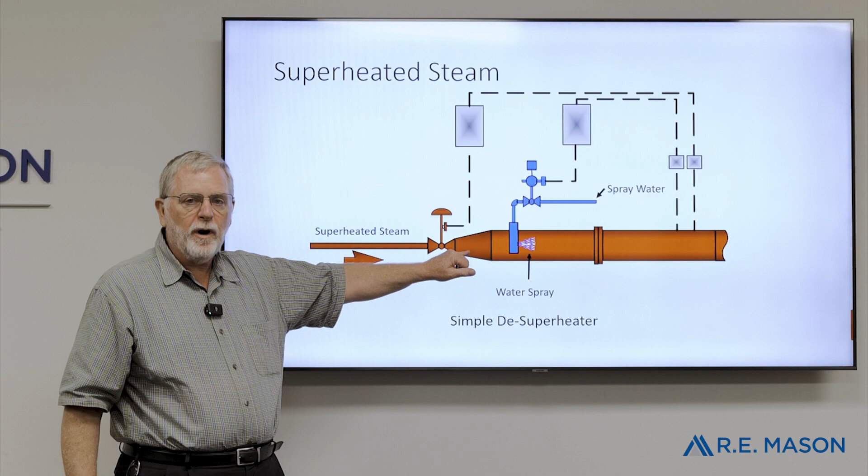So what do we do? Well, what we want to do is make sure that on annual outages we're pulling the desuperheater out, we're checking that nozzle, and we're making sure that nozzle is giving us a spray so that it's being absorbed and not a stream that's going down into your piping.

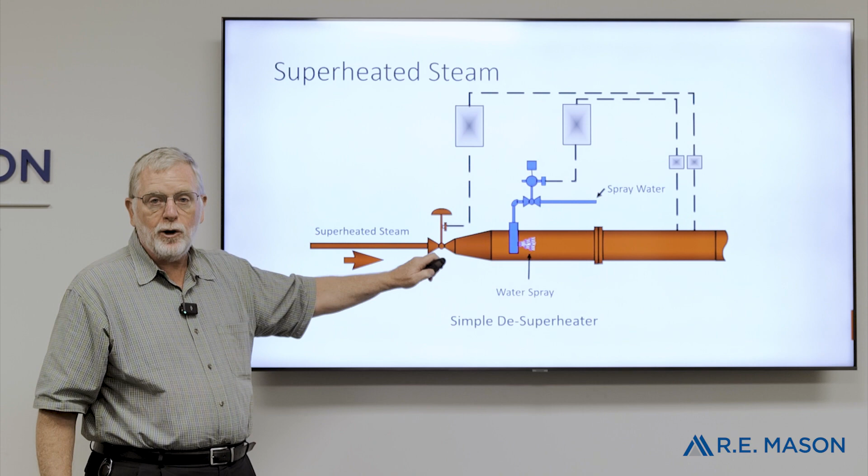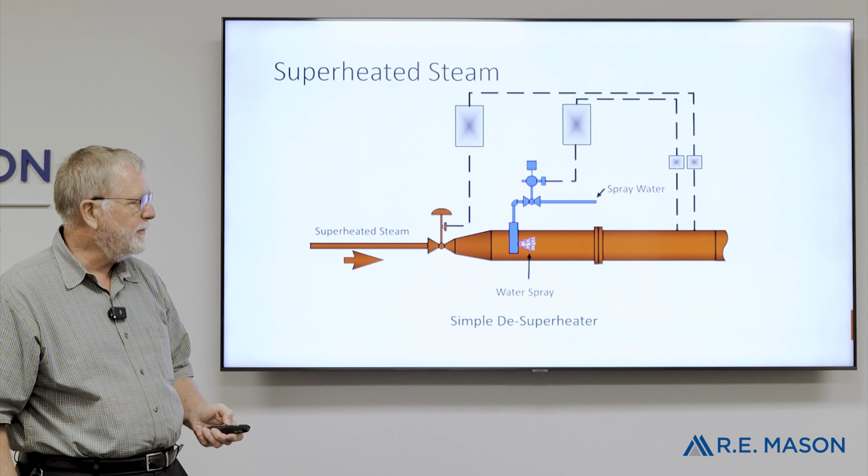The other case that we can have with this is that right here, we've got a control valve that's opening and closed. When we're not using the desuperheater, it closes. We can back up condensate. When we open that, we're tearing the valve up. We're getting leak-bys. We're getting other things that are taking place in the system. So something else that we would want to look at in this particular case is in front of the control valve, downstream being our desuperheater, do we have a drip leg in the system that we can remove condensate, or how is our piping done?

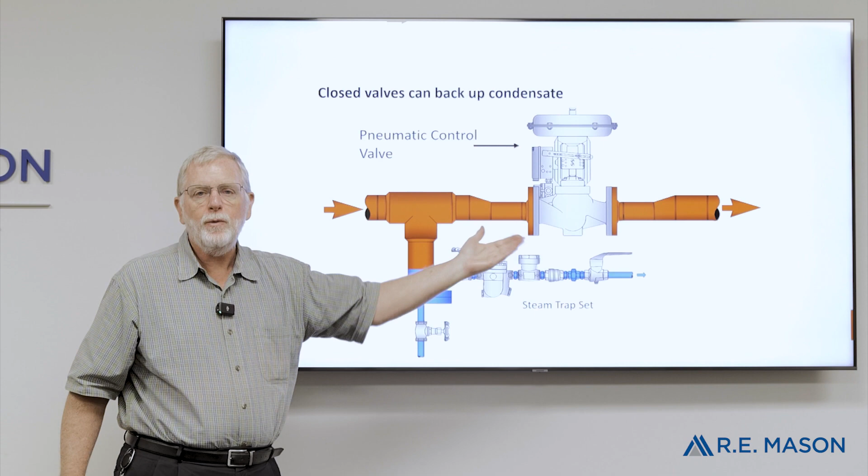Because the other thing is that we're coming into the control valve, we're looking for steam. Sometimes we have superheated steam, sometimes it's saturated steam and it's superheated because of the reduction coming through the control valve, which is why we're using a desuperheater. But if we have too much condensate, we're doing two-phase flow through our control valve. There again, we're not heating properly. We have the desuperheater, things are taking place. So we want to make sure we're providing good steam to begin with. Then we can go to the desuperheater to troubleshoot the system.